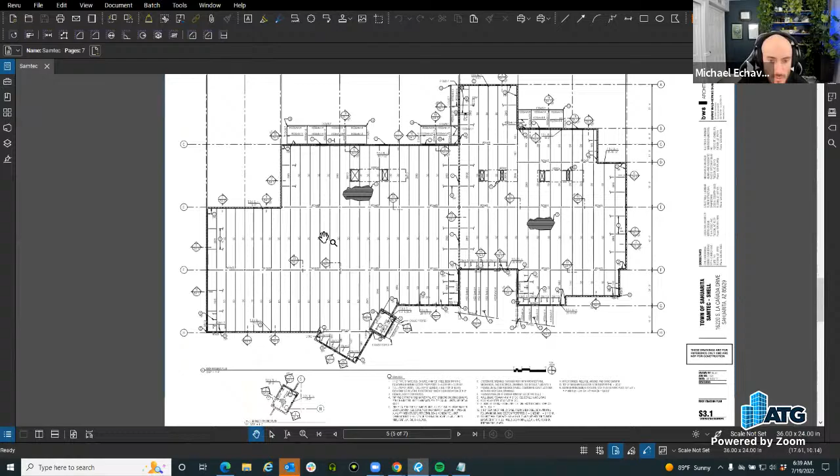But we are going to be talking about counts and sequences and how to create custom count and sequences. I'll go through and use a typical set that I've created before when I was in industry - it's going to be a structural set. We'll go through and maybe count some of our columns in place, and we'll create our custom symbols around them as well.

As you go through and get ready to create things for some type of itemized count, there's two different ways you can go through and do this. Jason just taught me an additional one because I never even thought of that either, so it'll be cool and interesting to recalibrate that in terms of having some type of area measurement grouped within it, so you could get a measurement within the group. So I learned something new. We'll go through and talk about how we can create these.

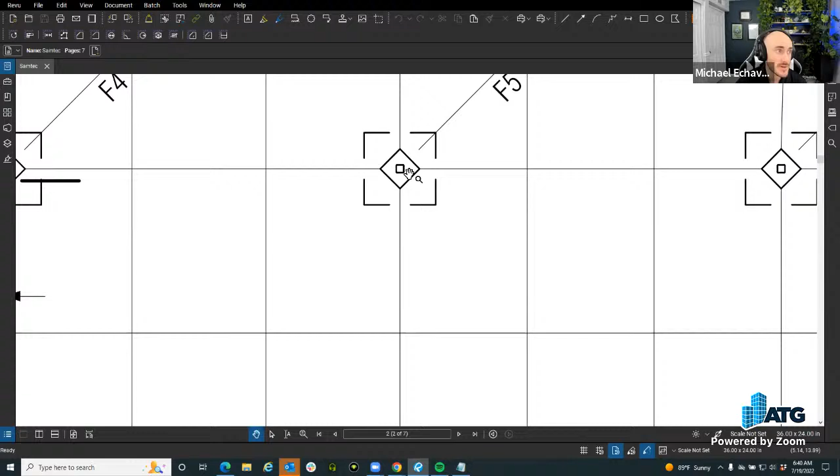So if I want to create a custom symbol, I can go through and create whatever type of symbol I'd like, and it's probably going to be an opposite type of symbol, so I can visually see the difference of something going over versus a snapshot. If there's something you wanted to do that is an existing kind of symbol, like a column for instance, you could go through and create a snapshot.

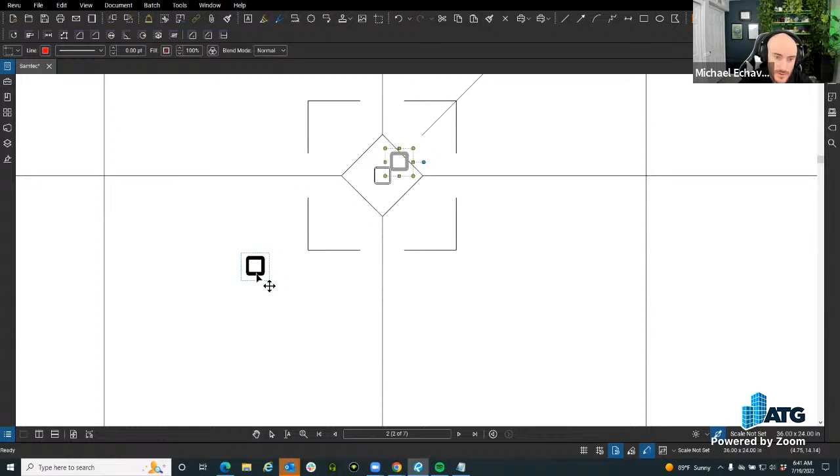So you could go and just edit, and snapshot this as your symbol that you would be using moving forward. Ooh, I didn't know that it wouldn't copy that same line weight. Okay, that's weird. Yeah, so going through and creating this into your new symbol as placement, you'd probably want to change the colors though.

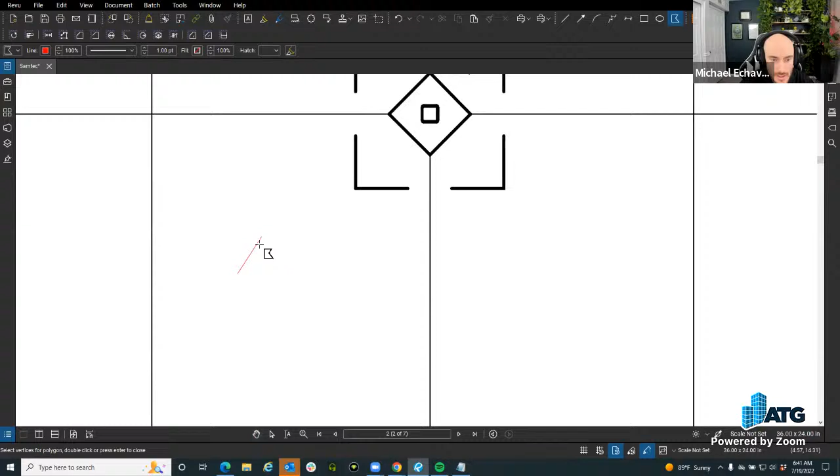But I'm not going to use this as my symbol, I'm going to go through and create my own. So I'm going to use a polygon and we'll just use a triangle for this next one. Ta-da. It's harder than it looks.

So the other portion is, okay, so I've done this, but if you want it to be a sequence, you have to have a value in here. And I don't want to make an editable tag, but we can cover editable tags as well.

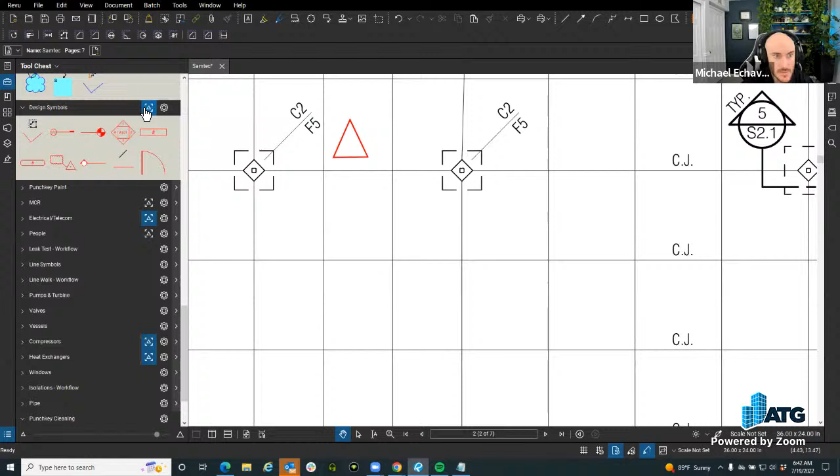So if you make a markup with some type of text in it, you can always edit the text later on. A perfect example of this would be some of the out-of-the-box symbols, so something like this, which would be an interior elevation. Oh come on, you have to have a scale for this? Oh, it's because it's scalable.

You could go through and change the text, right? But for this instance, I'll create one with text to have a visual increment, and we'll just put 1.

And for those folks that like to center these things, little tips along the way of knowing how things can be centered and aligned, because maybe it's not completely in the area that you want it to be. I'm going to select the text, go to style, and use the center align and also the middle. Then from there, you can select the text and select the shape by holding shift. So I place my text in here and then select my shape, and I can right click after the two are selected.

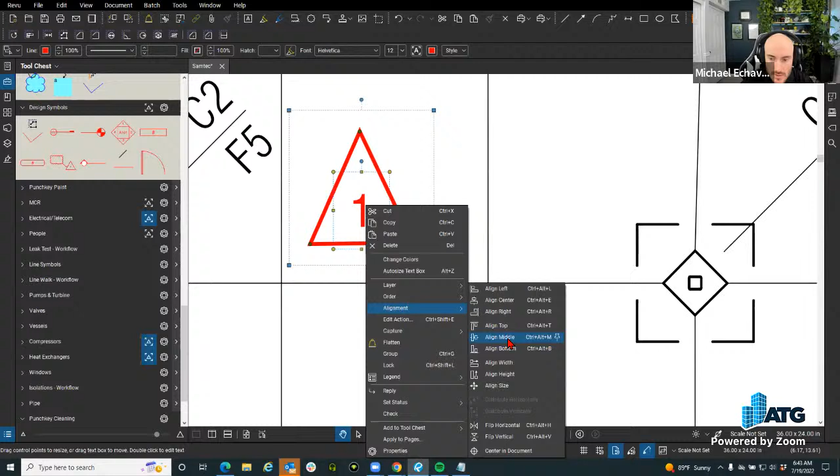I could have done a wide selection too, which is down here, but then we can go through and select my alignment and align to center, and then we can go back and align to middle. Technically, that's probably correct, it's just the triangle's a little off.

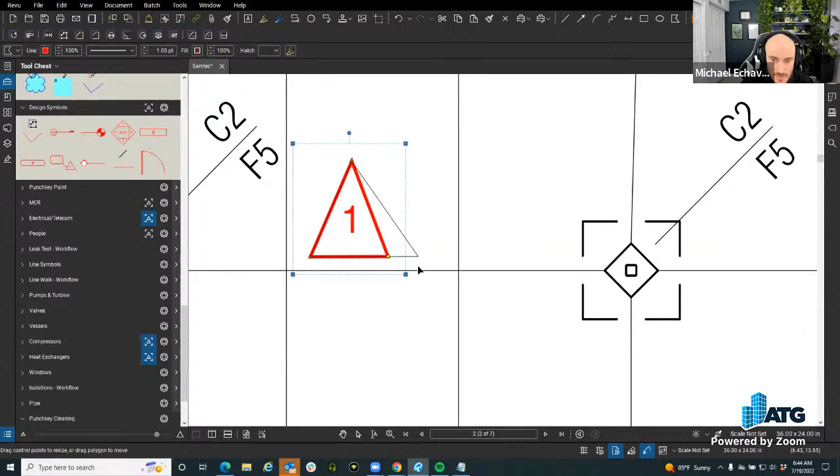Okay, so we'll just deal with that. I think it's because this isn't straight, and I wish you were able to hold shift. Oh, you are, okay, get it straight. You're trying to go for an equilateral triangle.

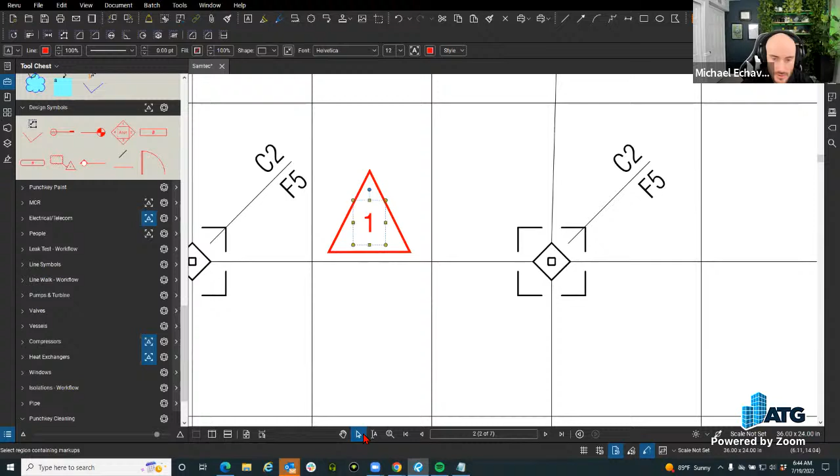Yeah, okay. So as this has been placed, what you want to do - I haven't really tried it with a wide selection, going through and just grabbing all and seeing what it randomly guesses is the order. But if you're going to create a count, you need to be aware of how you select them in order of placement. Well, I guess not really, because even when the count changes, it's going to change to a label. So just being aware of order of grouping.

If you aren't going to create a count, you need to be aware that if you select the text last, the text comment is going to change. So you always usually select your text first, then the shapes, so that the comment gets assigned to the shape versus the comment that's in the text, which is the value that you see visually.

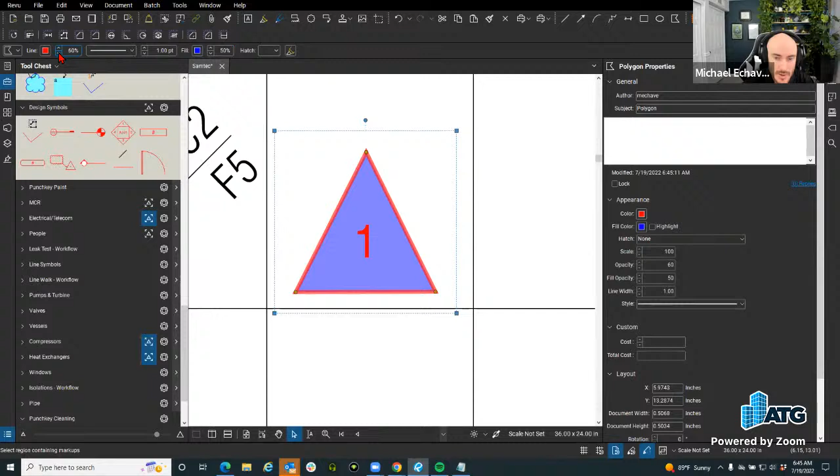But going through and creating this, I'm going to also create a hatch for it. We'll do a fill of blue, change that opacity, change this line opacity too. And we'll make this green. There we go. So now that I've created my custom markup, you have this thing called the tool chest.

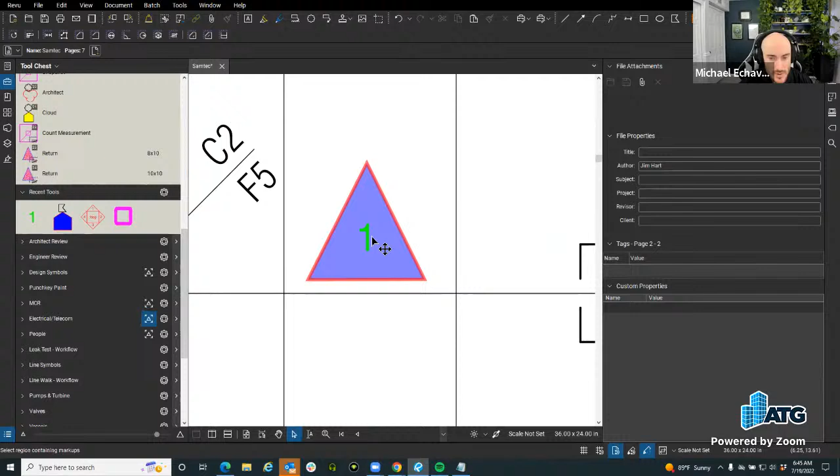So the tool chest - oh, I've already done this before, huh, funny. So going through and seeing your tool chest, you have your recently made markups, right? So this hasn't been grouped together yet. I need to select my text, then the shape, right click, and group, or Control G for the hotkey.

So hypothetically, if you're going through and creating these all the time to create a company standard, you probably would want to assign this to a hotkey - assign it to a key number for your keyboard or your mouse, right, so that you just press the button and it automatically hits Control G for you, or reassign it to a value on your keyboard. I have some additional items on the left-hand side of my keyboard, but you can make it a little bit more efficient for you to go through and create a lot of these.

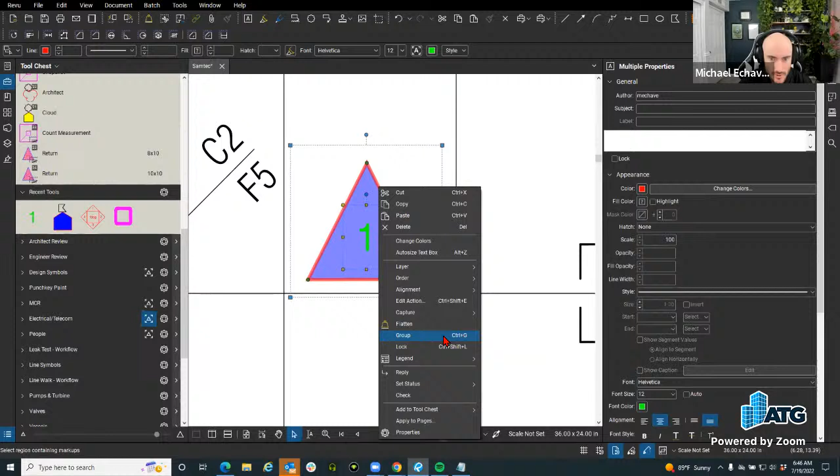But again, going here, we'll create it as a group. And then now I see this newly made markup in my tool chest. So we have the tool chest over here on the left-hand side. The tool chest is going to be the item that saves all of your recently made markups, and you'll see that in the tool set called Recent Tools, for those folks that have never used the tool chest before.

I'll just kind of midway go through and explain this. If anyone needs a little bit more explanation, just use the Zoom chat or the Q&A area. We'll have Mr. Artley checking all of the above so that we can go through, because it's going to be a little bit harder for me because the YouTube chat is smaller. I'm on it. Okay, so going through, I'm just trying to look at it.

That's why. But going through and creating our symbol, we are going to then add it to a tool set. So you cannot go from your tool set and create it from your recent tools - it has to go into My Tools or a custom created tool set.

So tool sets are kind of like an Allen wrench set - that's my analogy that I always use when we're talking about it. Basically, you have your toolbox, you have an Allen wrench set - and I used to call it Allen keys, but I guess no one else calls it Allen keys besides myself. So the Allen wrench set lives in your toolbox, hopefully, unless you have kids that don't place it back, or maybe you are like your children and don't place it back, right? That happens to me sometimes.

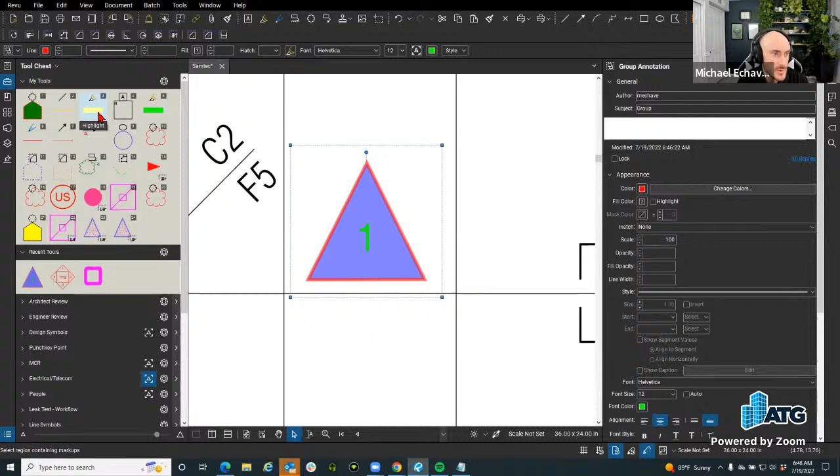I don't put my tools back in the tool chest or my toolbox, but that's where they live - they live in the tool chest. Your Allen wrenches live in your toolbox, and then usually you pick out the correct Allen wrench, or Allen key, for the correct bolt that we're going to go through and either loosen or tighten. Basically, that's the same thing here - we have our markup, which is our Allen wrench, that lives in a tool set, that lives in a tool chest. What do you think of that analogy, Mr. Artley?

I keep my Allen keys up on my wall, so it's not relevant. Man, I need to update my things. Yeah, no, it's all good. One question here though.

So as you were going through this and created your triangle, David thinks he can do it in about 10 clicks. Maybe there's a competition coming up, so start practicing. Ed had a question about the pick order: while you made that group, you have to pick one before the other. Which one, and why? If you group, it wouldn't matter for the count because the count gets assigned to a label.

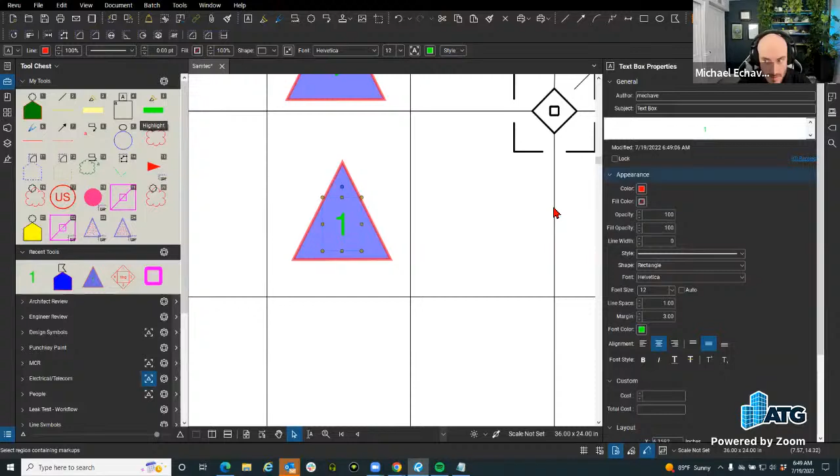Actually, I don't know, we're going to test it because I'm going to do it the wrong way. If I select the text here, we can see the comment is associated to the text, because if I change the comment, it's the text we're seeing visually. The comment is the text visual for a text box. Whereas a shape, it still has a comment associated to it, but it's associated to the shape itself.

So if I order the shape first versus the number, then the number or the text box is going to change later. Going through that same thought process, I group these - I have a value here now. If I type this in to give it some metadata, let's say I'm creating some visual item that has a number associated to it.

I wanted to give it some data before I make it into - this isn't changing it into a measurement feature, so count, because I'm going to test if this still does it when I create it into a count. But if I change the value to something different, like column, or this is going to be a 12 by 12, because I wanted to label it that, the comment changes.

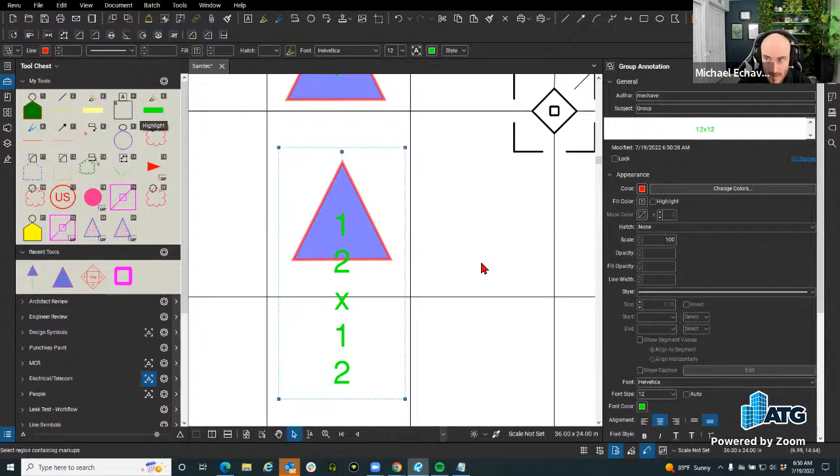But if I do it the opposite way - group the text first, then the shape, and group them together - I can see there's no value here. I can give it that metadata that I'm going to see in the markups list without it changing the text. But this text is still dynamic. If I wanted to change this to something else, I can, but the comment lives with the shape, not the text. It's super confusing, but that's why the grouping order is so important.

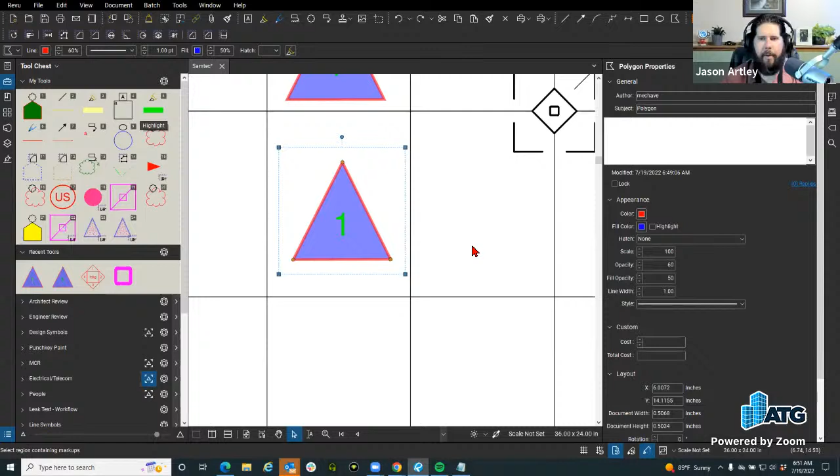But my other thought was I wanted to try this. So what are you trying? Okay, I want to see if I do it this way - the shape, then the number, the text - and if I go into create it as a count.

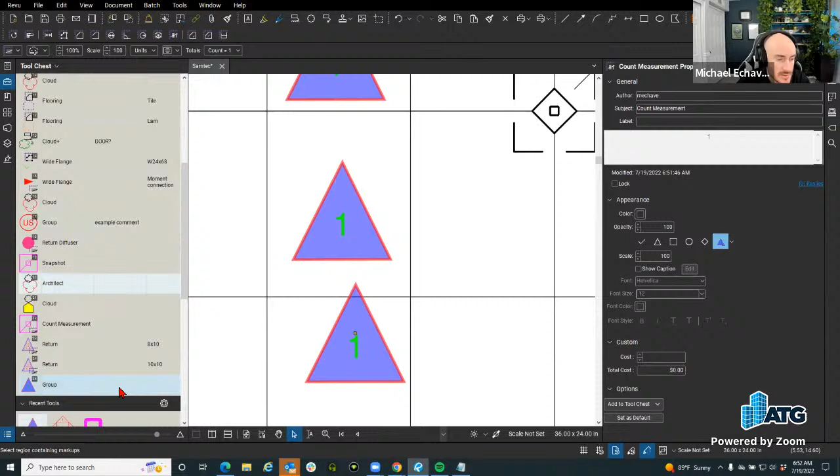I don't think it matters at this point because you can't change the comment in a count. Right, so it doesn't matter the order if you're creating a count, because at the point of creating the count, there's no comment associated to counts or measurements - it's subject and label.

Okay, so comment thing here, question: if you right click on the text and hit group, the order of selection doesn't seem to matter, but it matters only if you use Control G to group them. Question from Alex in the chat. I think the right click and Control G should be identical in function.

And it was - yeah, so for me, if I ungroup these and use right click, same thing here, then holding shift, select this, then right clicking group, I still have that number value. Okay, so ungroup them and then do Control G just for - oh okay, yep, I get it. So now Control G - same result, alright.

That's all we wanted to test. Well - not the same result? Not the same result. Okay, so this is a weird one. Nice find, Alex. Yeah, so if I thought he meant the right click.

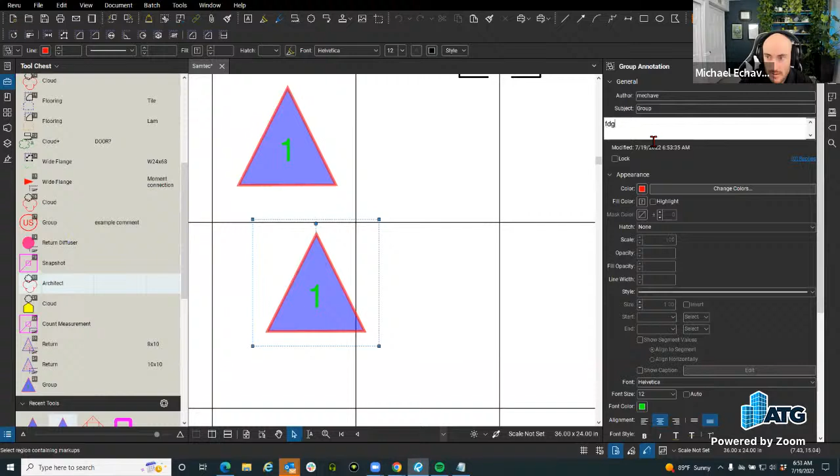Right click Control G negates the order, meaning it doesn't matter the order of selection. Because if I were to group this, it would have assigned it to this - the text. But Control G - yep, so Control G, regardless of order of selection, but right clicking grouping matters order. So the order does matter. Pretty weird.

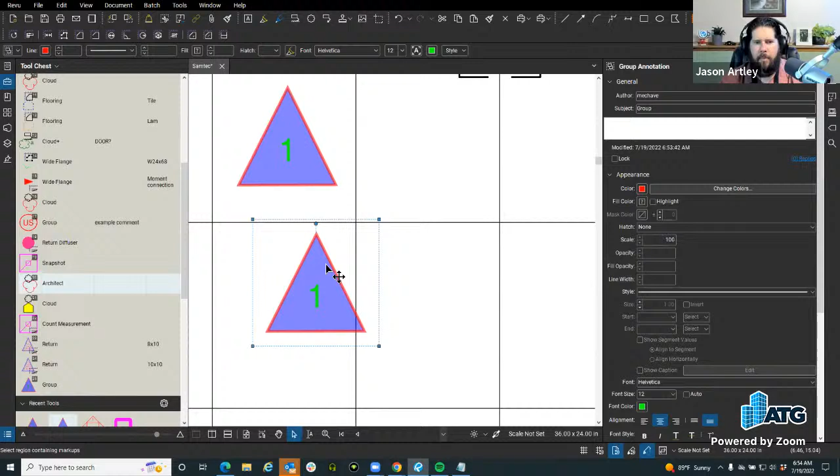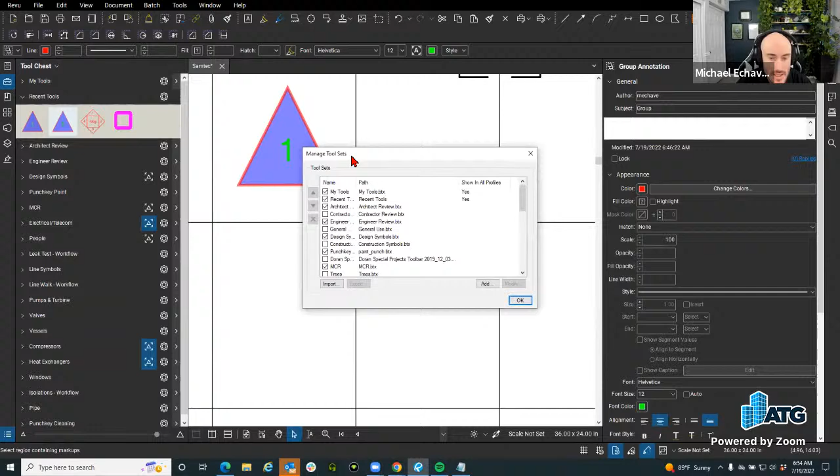From here, you can go to your tool chest and create your own. For those who've never created their own before, check the intro videos on how Bluebeam Revu works to learn this, but I'll gloss over it here. You have the option of going to manage tool sets, and from there you can go through and add your own.

You just give it a title. You'll probably want it to display since you're adding it now, so show in all profiles. For those new to Revu, hopefully we know what profiles are—if not, I recommend going back to the Bluebeam Revu basics and then coming back here. Basically, you can show it in all profiles or just one. It's not particular; you can't pick specific ones, it's either all or just the one that's active, and that's the way it saves.

So you title it, save it, and then from here you can drag it into wherever you'd like. Once it's been dragged to where you want it, you have your options to decide what you're going to do with it—you can right-click.

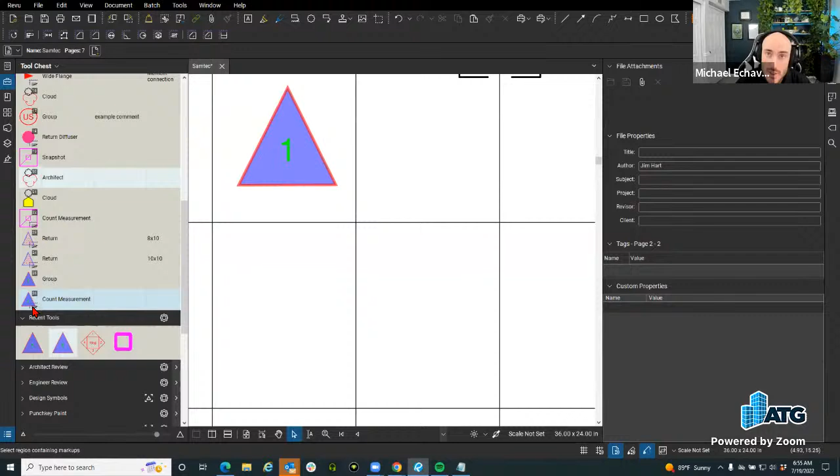Since there's a number value in here, it could be a sequence, which I do not prefer—some folks do prefer a sequence value, but I don't. You can create it as a count instead, which is what we'll do first. Once it's a count, it's a measurement, and when it has a measurement, you can change the subject matter and label for it. This will show up in your markups list as well.

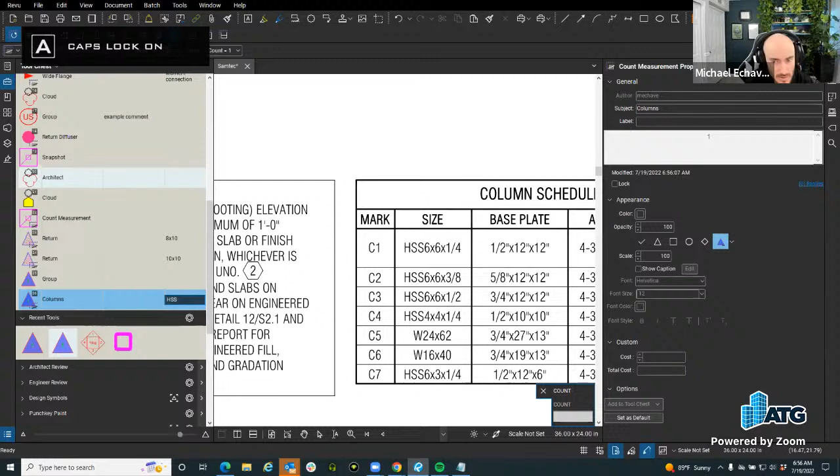I need to see what my C2s are, and they're HSS. So we'll go through and say the type of comment—these are our columns, so we can sort our data. Then we'll have a different size as the markup itself: 6 by 6, 3/8.

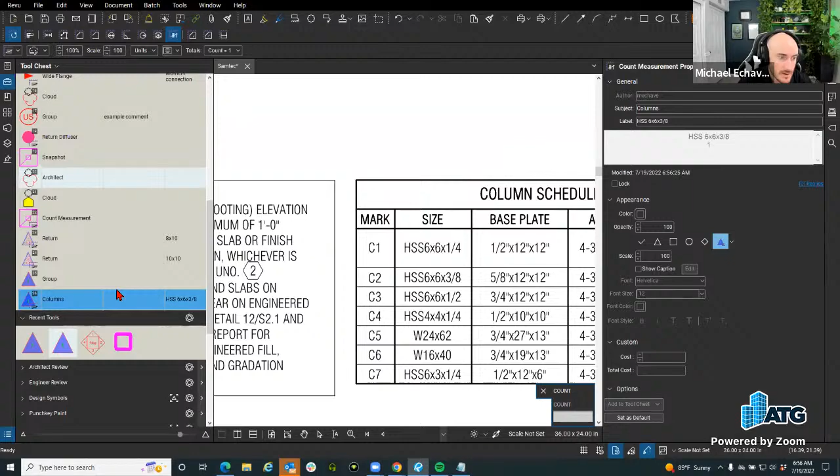Now that data lives with our count. As we go through and place our counts wherever we need to—we'd probably search, but I'm just going to place a couple of these. Now that data lives down here as an itemized count. So we have columns, one markup count column created, and the number of counts placed too. It's going to itemize them as grouped together.

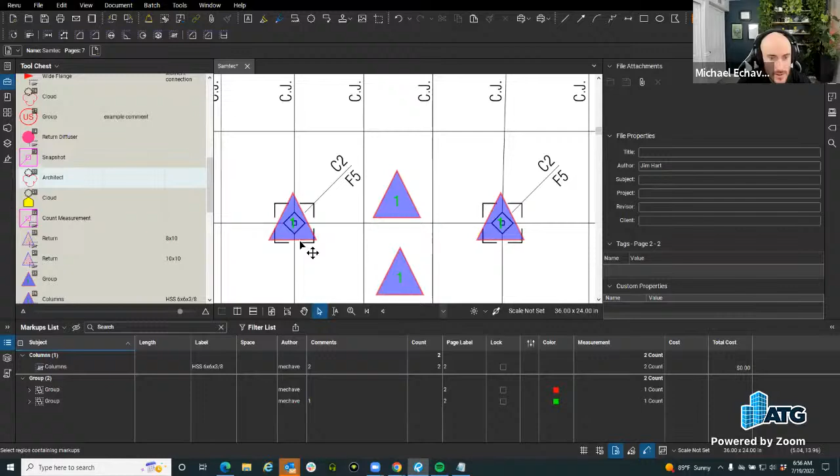Let me resume count so I don't have to worry about, 'ooh, that's a 3.' We'll just place them out here. Basically, it's not creating every instance placed and showing it down in the markups list—it's going to have them as collective columns, with the size grouped as a whole item together. Make sense?

So the next one is going to be the sequence, which I don't prefer, but some folks do because they're not going to use the markups list—which kind of bothers me, but that's your workflow. They want to visually count on the screen, which kind of comes down to the old style of pen and paper, though even then they probably just highlighted and had an Excel sheet next to them to input it into.

But you can always right-click—if it has a number value, you'll have sequence available, and you can define the sequence. Defining the sequence value, you get the option of deciding what value you want: numerical, I don't know what IIs are, it's probably like Roman, or alphabetical. So you have options to select what type of value you'd like.

I'm going to use numerical. It could have a prefix and suffix to the value, and you can start your increment at whatever value you want—it could start at 1 and increment by 2, you decide how that works.

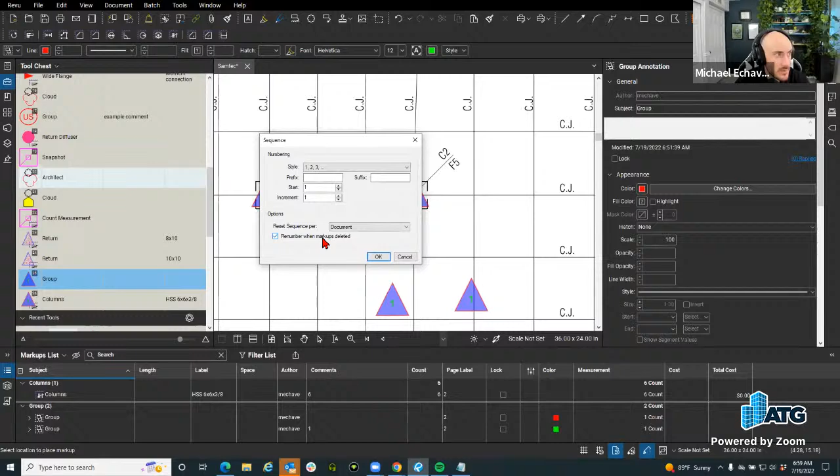Of course, I couldn't see why you would not want this, but that would mean if you placed a sequence value and deleted one, it wouldn't renumber all of them in the order of what it was before or after, right? So I'm going to hit OK.

Now these are two different symbols. You can see the count one I did first has the measurement symbol, and the sequence has a backwards play button, or skip - no, because skip has two arrows. Maybe it's a backwards play, or previous page symbol is what I'll call it. But now I can go through and select this, and as I'm placing it on my screen...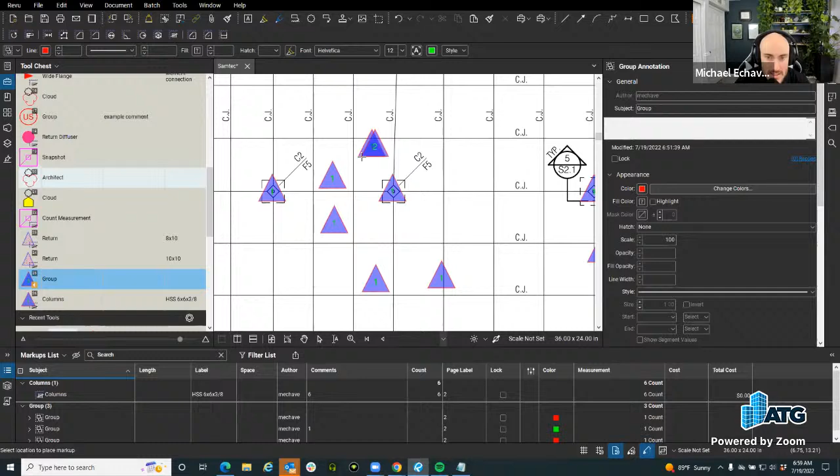It's going to increment the amount of what it is. The only thing I don't like about this is down here, every single instance gets its own instance in the markups list. So the count grouped them together - the group of every instance incremented on the page, but down here gave me a single markup for everyone placed.

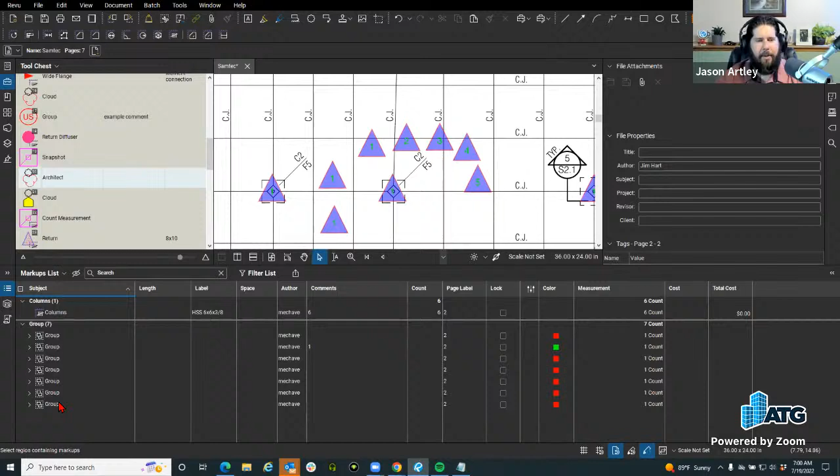Exactly, but it looks better on the screen or on the PDF. And you could minimize that group if you wanted to and collapse it. But this is where you could add more detail. I get the frustration on both sides. So I don't prefer this, but some folks like this because then they can visually see.

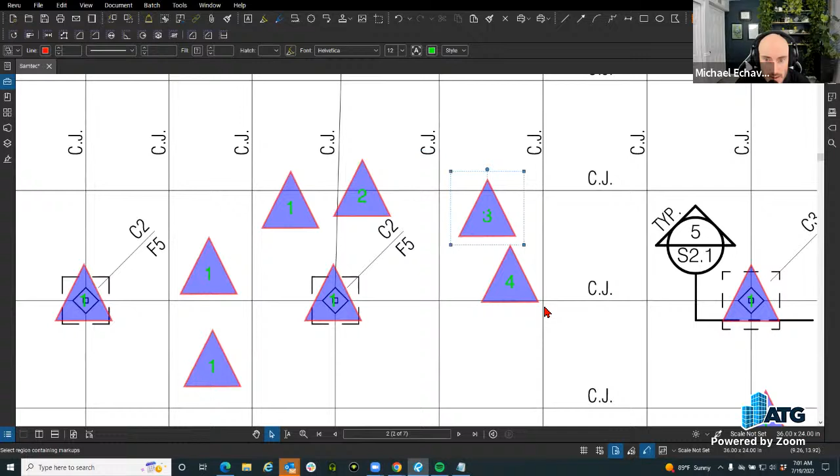Some tips with them though, just as we're using them. The sequence, since I said you can delete it, you can right click and delete the item and it will recount, right? You can change the sequence number, you can resume sequence, you can select the sequence itself, the entirety of them. You can auto size the text box of the sequences - that may be an option just in case it oversizes with too many values.

So you can change the sequence number if you wanted. This one should be 5 - it wouldn't work because it's not valid in the order. We'll do 2, and then we have 1, 2, 3, and then 4. You have the option of going through and doing that. You can resume the sequence.

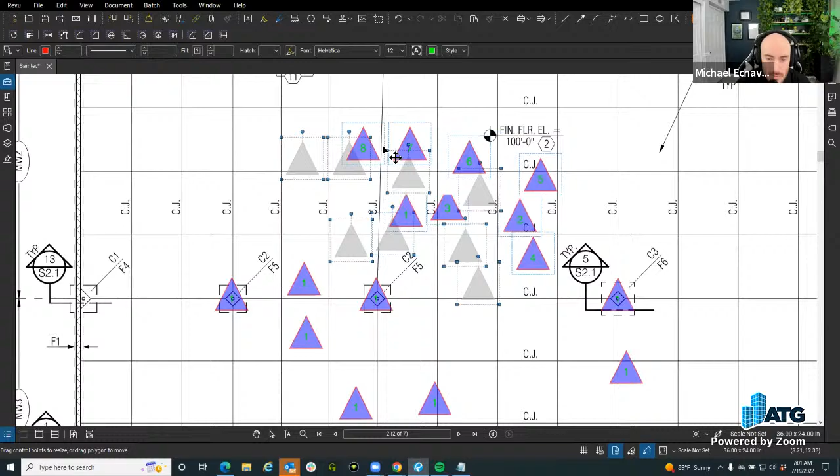So as they've all been placed, you can select the sequences and move them around if you needed to. Those are kind of your options with sequences.

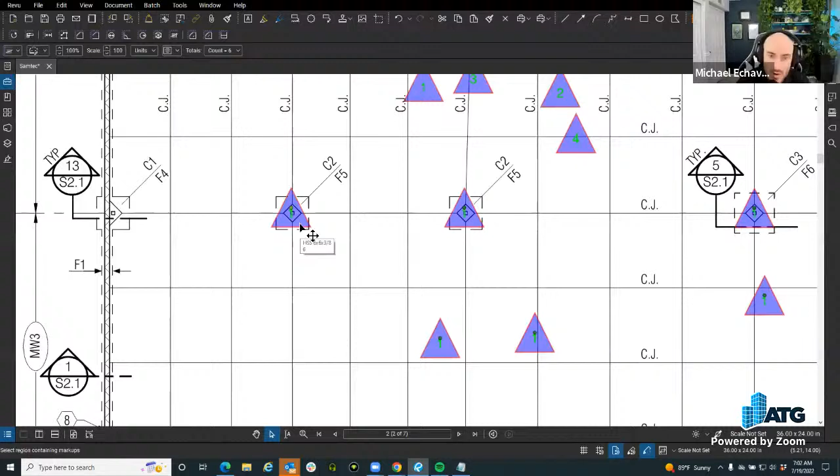Now counts, since we did the count, let me move the ones away that weren't counts from here to here - delete you. So these are counts. Once you select the count group, you'll see the nodes populate for the single grouping of counts that you have. And from here, you can see which one you individually have selected - it's marked with a yellow color. The ones with green are just part of the grouping of that individual count.

Now, if I go through to here, I can delete individual counts out of the total count realm. That is just by going through and making sure if you select shift, you can select the node and make sure you deselect your original selection. But as you go through, you can select multiple ones of these.

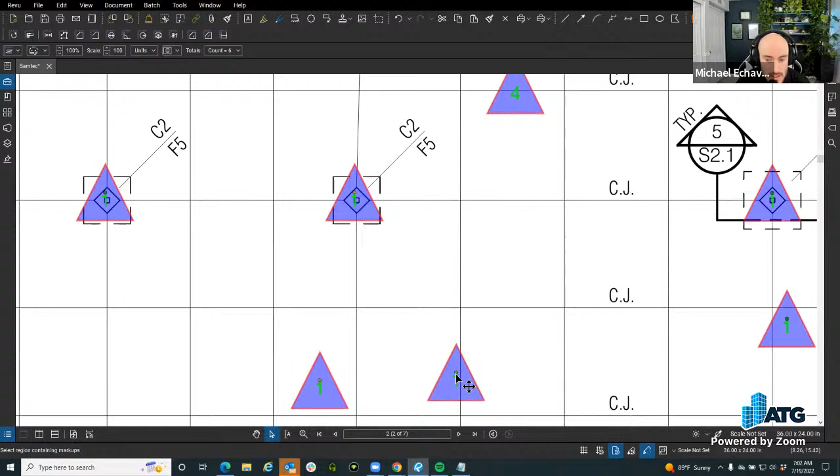When they're yellow, you can then right click, but don't hit delete because that deletes them all. You can delete columns, which is the ones you have selected from the group - so it says from the group, letting you know it's not the whole group. Delete is the whole group, but it's removing those 3 from the group. So I can go through and delete that.

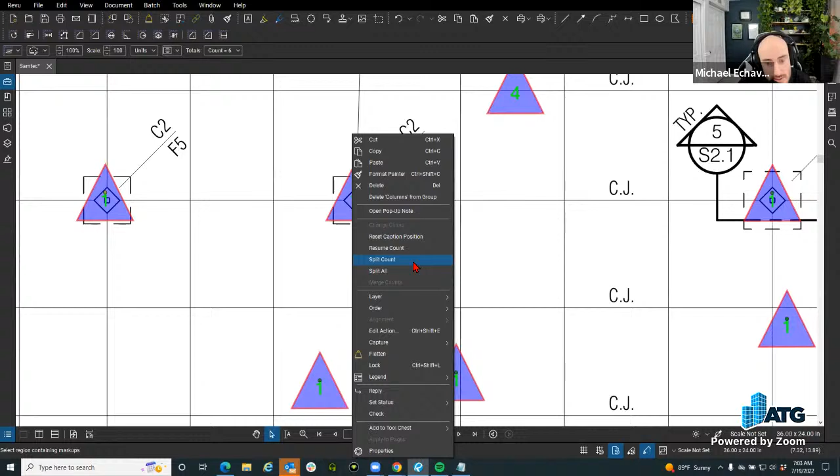The other option is resume counts - so if you wanted to go and resume the counts, you can. You can also split the count, but if you're splitting the count, it's with whichever ones you have selected. So be aware, if you want to split the count by these 2, you can split the count, and now these 2 are their own counts of the same type of count that you've created.

Can you merge them back together? Yes, so down here you can then select your multiple columns and you can merge counts back together. Ta-da.

That was David's question. Oh, I thought you were trying to just trick me. No, and I was like, look at that, Mr. You're on fire today. I'm backing off.

So over in the Zoom chat, Chris has got a question: can you make it a legend and then have it update? Can counts and sequences be added to legends?

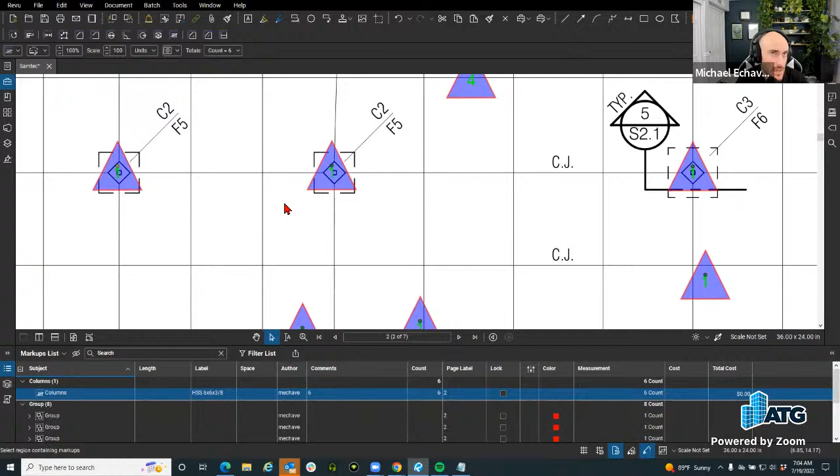Mr. Chris W, if you subscribe to our LinkedIn page, myself or Mr. Artley, we post quick tips, and I just created a quick tip on the legend feature. Basically this was because there's no native way to just right click and save legends. So you have a bunch of legends, which makes sense that you can add it to your tool set. We'll cover both for you. So basically, yes, you can.

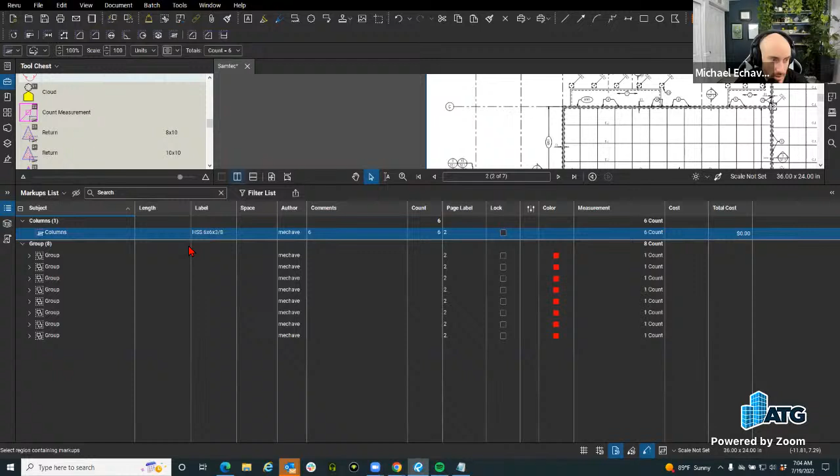Now that I've gone through and created my own, you could create a legend from something that's in your markups list already. We're not going to do that, but you can. You can right click and be selective of what you want. Why isn't... did I freeze or did Revu freeze?

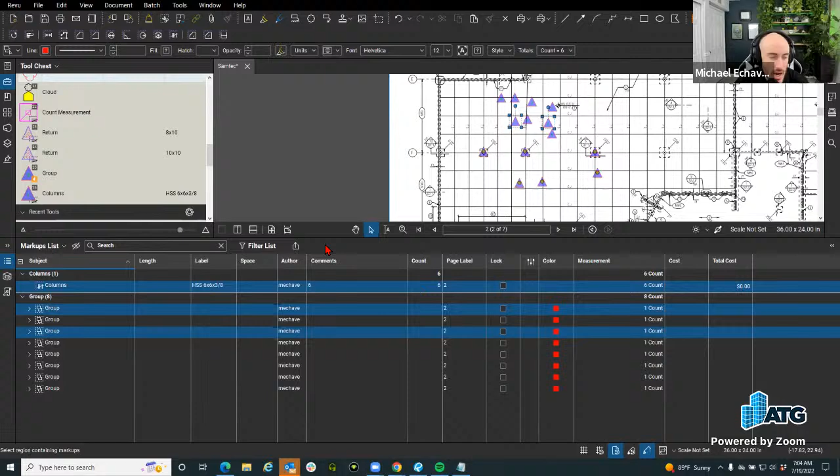I think I'm still good. There we go. So you could be selective by holding Control Shift. You can then right click and go to legend and create new legend. So you can create a legend from here, but that's not going to auto populate. And I think that's what your question was, Chris, but you can go through and auto populate the data for it, and that would be a better fit for something that you've created in your tools.

So if I go to my tools here, I can create a legend under... sorry, I just said you can create a legend. You can go to any of your tool sets. There's the gear symbol to the right of it. Have to have my instructor hat on sometimes during these. The gear symbol, and then you can go to the legend and create a new legend.

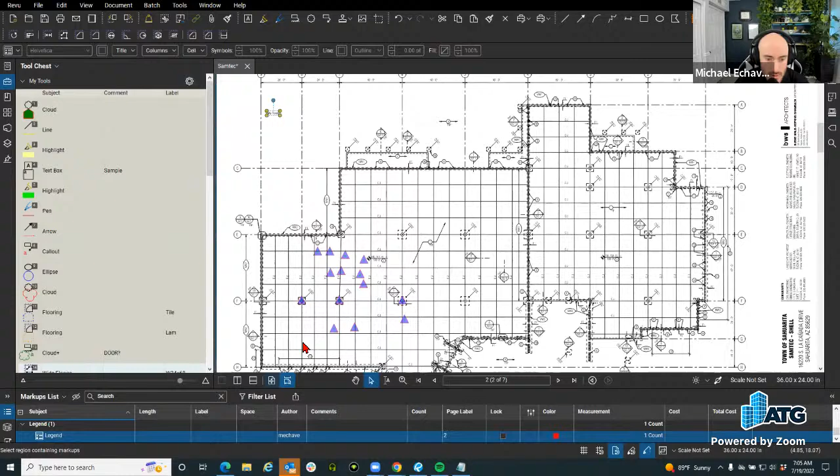This is just going to create a legend from what you've created already. And I hope my legends aren't broken because this has happened before. Revu is just not playing nice today. So from here, you can go through and decide what type of data you want to show. I'm pretty sure this is just... I know this has happened before.

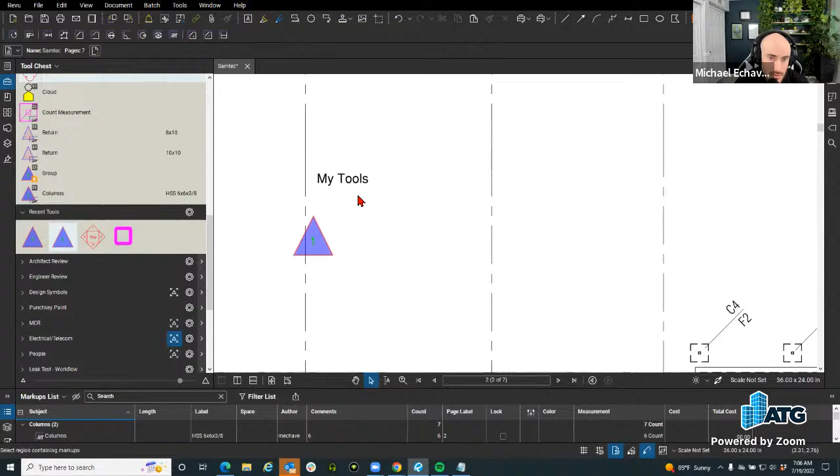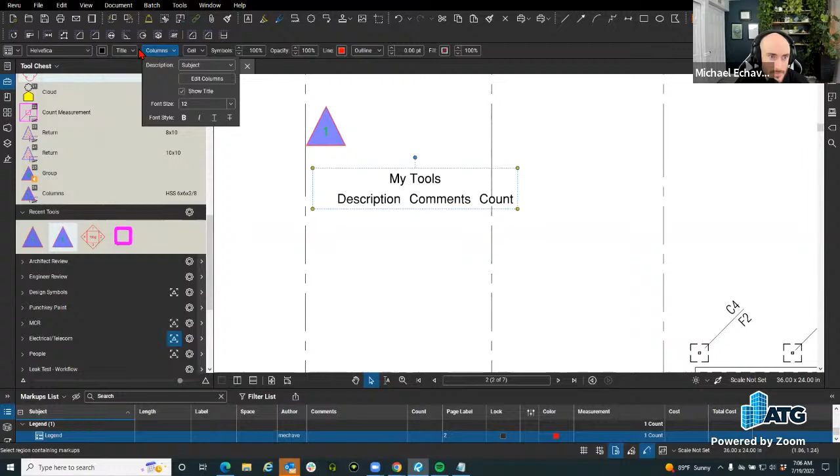Yeah. And I don't know why it happens to me, but the data isn't populating as well, maybe because I don't have titles on. No. Yeah, we've had this happen to you a couple times, and I don't remember. It happened to me in a training. Yeah, I had to exit out of the PDF and try it somewhere else.

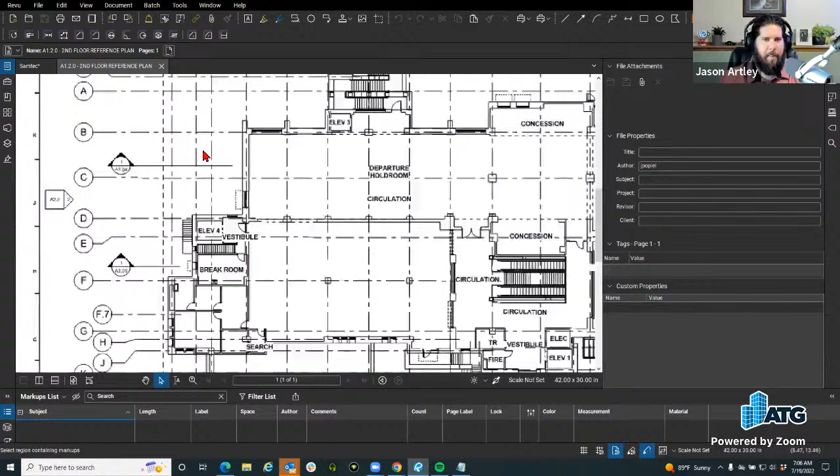Interesting. But that little clip that you made on YouTube is functional. Yeah, if you want to go to my LinkedIn page and copy and paste, you can. Okay, on it, on it.

I'm assuming it's the PDF because I think that's the PDF it's happened on before. So here, I have it here. It's working on this one. So if I go through... it's probably something, did I have a signature in one of these? Saving a legend in Revu right there.

Weird. But okay, so as you go through and customize these, and Mr. Artley is going to post the thing still regardless, but you can go through and create your legend for whatever data you want to show.

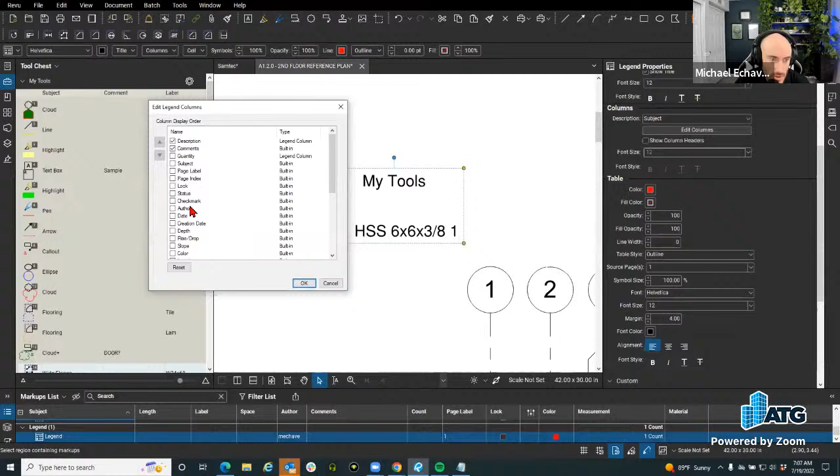So up here in your dynamic options bar, you have columns, you have edit columns, and then you have description. And then you can go through and we want count, and we can see what we have here. So if we've organized this the way we wanted it to be, maybe some grid lines with some additional point values so you can see them, maybe with a black outline.

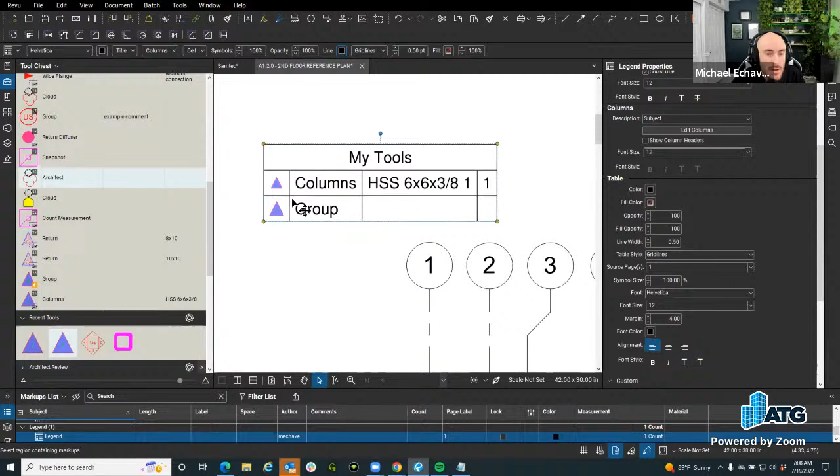Hey, I took the time to customize this legend the way I want it to look for my specific tool set, right? Before, you're like, well, you can't right click and just save the legend. But what you can do is add it to a tool chest, which is kind of like right clicking and saving a legend. After I did the video, I was like, Michael, that is like saving the legend. So in the video I said there is no native way, but there really is. And I was going to go edit it out, but I was like, whatever, it's already done.

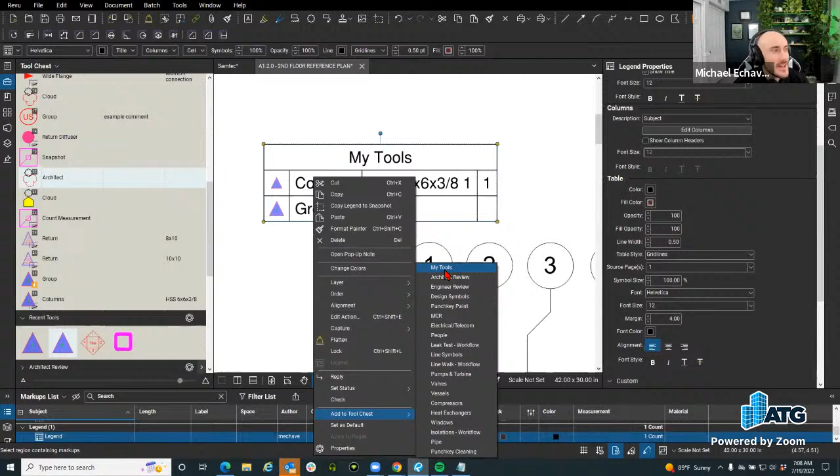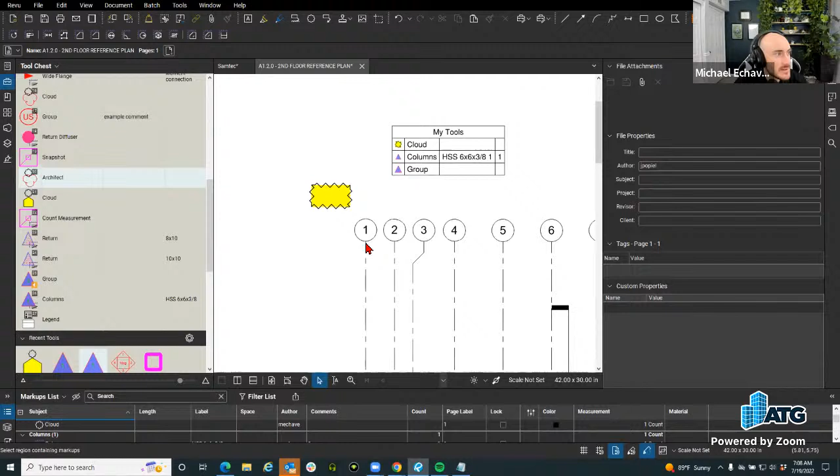But you can go to my tools, add it to my tools. Now, anytime you place it, it's created the way you want it to look. So then you can just click this, place it, right? And it will itemize for any ones that have been placed. So any of these that have been placed, it will add them just like that. So it magically updates depending on what you want it to show.

Yep. And this is because it auto updates since it's from your tool set. So whatever tool has been added to your tool set - and I think I've done it where you can add a new one and it still works. So regardless of you adding new ones later on or forward, it will still populate and show them in the tool set in your legend. Whereas down here, you have to select which ones you want to go into the legend if you go that way. Hopefully that helped, Chris.

I would imagine so. Yeah, you can also save your layout as default.

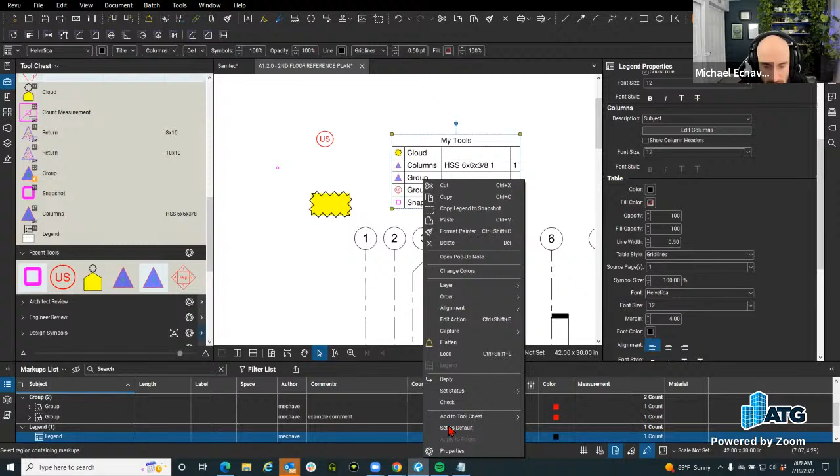I don't like to set defaults though. I wish this tool was never here. It causes more problems than I think it solves. But some folks really like it. Yep, because tool sets are too hard.

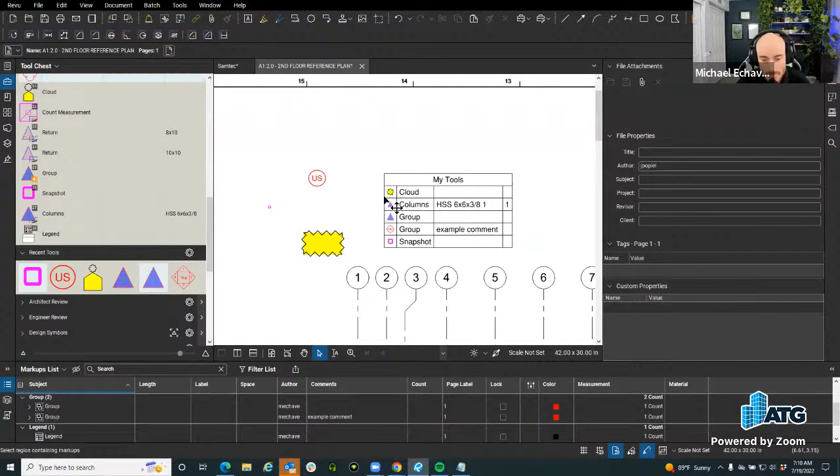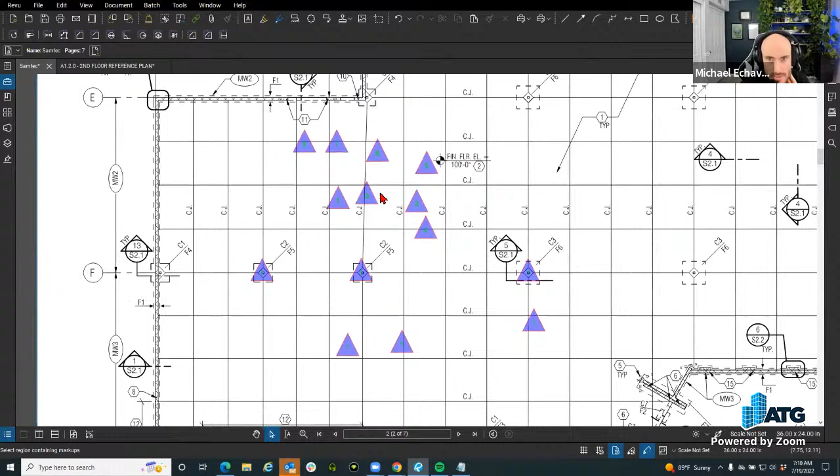Pretty magical. All right, so you've done a count and you did the sequence, and both of those were using your little triangle shape. Are you limited to polygons or can you use any symbol? You can use any symbol for a sequence, but you have to have some type of text to fill the sequence value in. So yeah, you can use any shapes you like. By all means, get very creative on what you want to show.

I mean, even with this text box, you didn't even need to create a shape because you can add a shape to them.

So that would be for sequence, but for your counts, you wouldn't want to do that because then it's going to change. Well, I guess you could even do it for that. I'm just thinking of doing like a punch list with comments and stuff. You wouldn't want to do that for those, which we're not talking about today, but we can if you have questions around those as well.

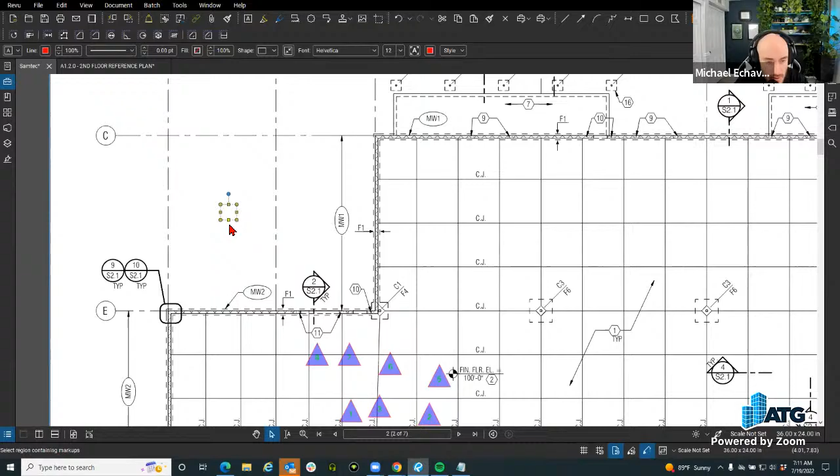Now let's get to that good part of what Mr. Artley was telling me about before I even started this. I'm not going to explain it because it's probably someone else's workflow, but we're going to go through it. I want to—I'll tee it up.

Okay, tee it up. So I was doing a Revu demo for a firm, and they do a lot of geotechnical work. He kind of threw the question at me, and I'm like, I don't know, I've never heard of anybody doing this. So I figured it out on the fly, and it worked out well.

So I wanted the opportunity to pitch Michael the same question, and I've kind of already teed it up in his brain a little bit.

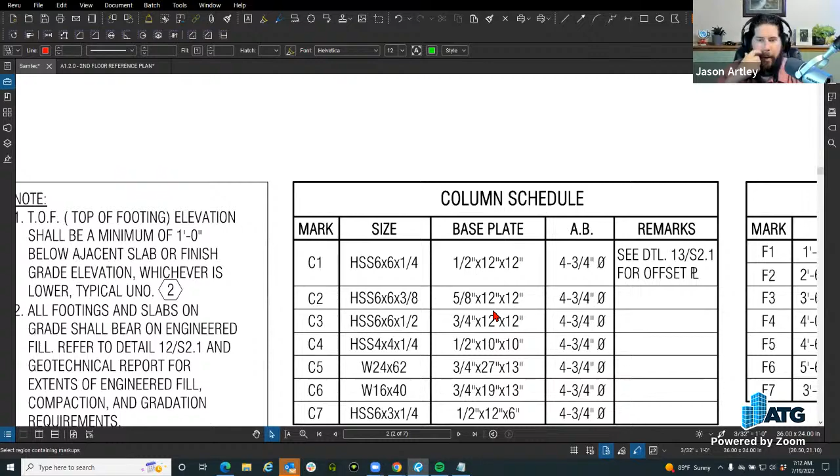But the question was, when they're taking borehole samples through the site, they want to have borehole 1, then borehole 2, borehole 3, and they're doing all this on a PDF. And from there, they don't just want the borehole to be a symbol, they want it to be an area measurement. So they can see that, oh, this 8-inch hole, cumulatively, they're going to be drilling this area of holes through the site. So can you do a count or sequence with an area measurement that will add up those areas and count them at the same time?

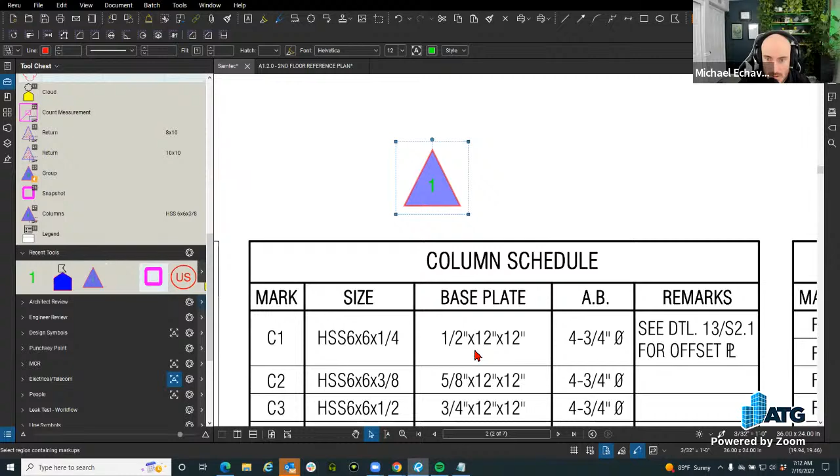So that was his question. I'm going to ungroup these, and I'm going to make the base plate size of what this is supposed to be with an at-scale rectangle.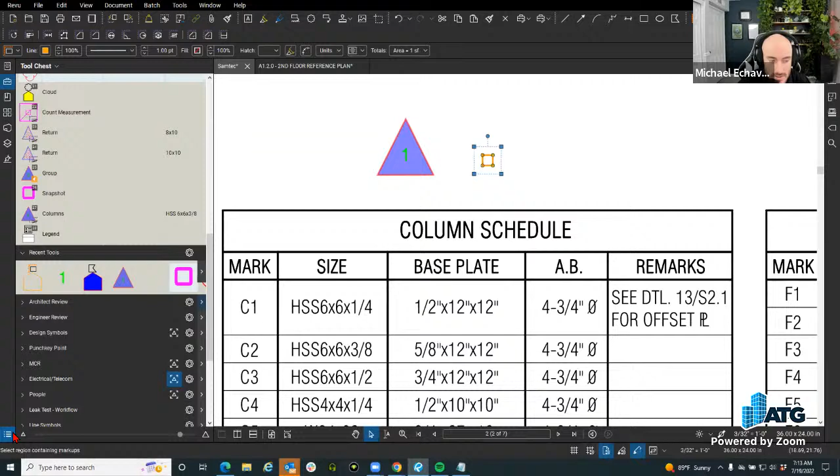Oh, nicely done, trying to top him for what he did. So I'm going to do 12-inch tab, 12-inch enter. And then I'm going to group these together because I have that size of measurements from my at-scale. So square foot 1, and I get all that data.

And I'm wondering, does the order matter? We'll figure that out. So yeah, I'm going to do this one last, and then I'm going to group these.

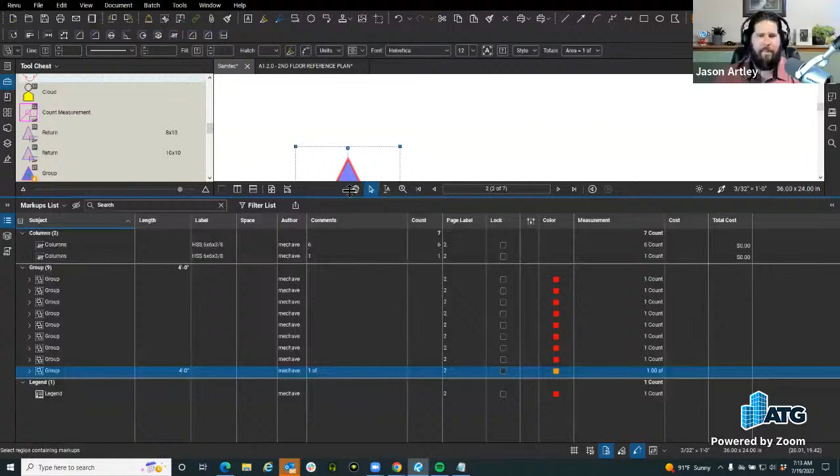You're putting 3 things together? You can't triple stamp a double stamp. I can't— this is not going to work. I just want an excuse to use that reference. It does work, it's right here. Look at that. Okay, wow.

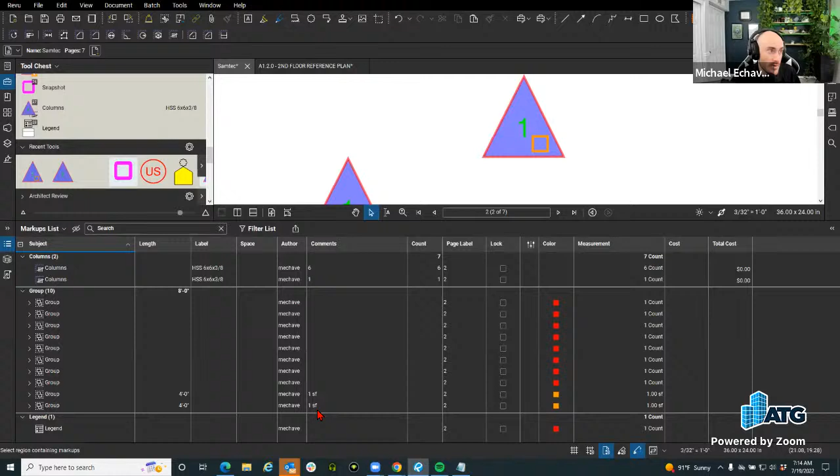So now all of that data lives with it. This is mind blowing, because you could have some measurement data that kind of is an itemized package of placement. But that's kind of the same thing with custom columns anyway, assigning another custom column—but now you can add a measurement to it as well, which I didn't know and didn't think of doing. So thank you, Mr. Jason, for finding this out for me. This is definitely going to be a new item to show.

So now I can go through and place this with my columns, and I could label them as subject and have the... let's add it into here. So the comments won't be able to be changed, but the subject will. You may just have to... oh, you can even put in a label now. That's so cool. So without even being a measurement, I could have labeled it.

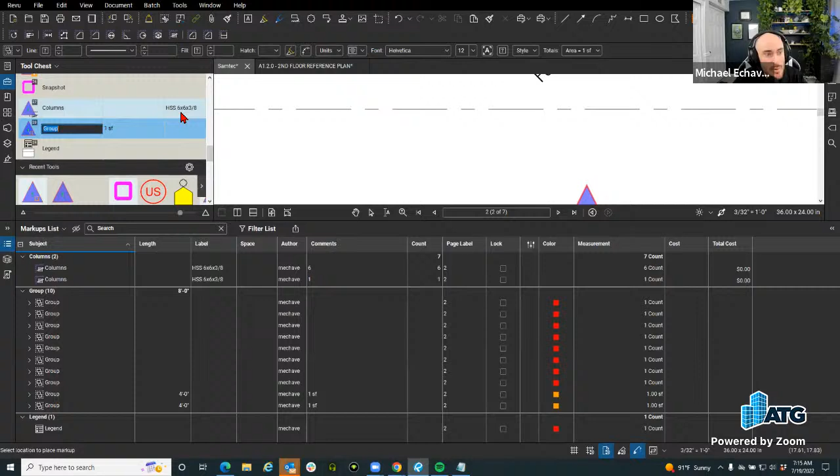Now my label would be the size of what it is. And then my grouping, which usually you only get a label if you have a measurement, but it probably gave you a label because there's a count measurement in there, which is at scale. That's really cool. So now I could do columns, whatever the size of the column is, have an itemized placement of those. And I could create a count.

What will it do? Oh, it removes it. Boo. Boo. Bummer. Okay, going back to this though, I'm still excited about this.

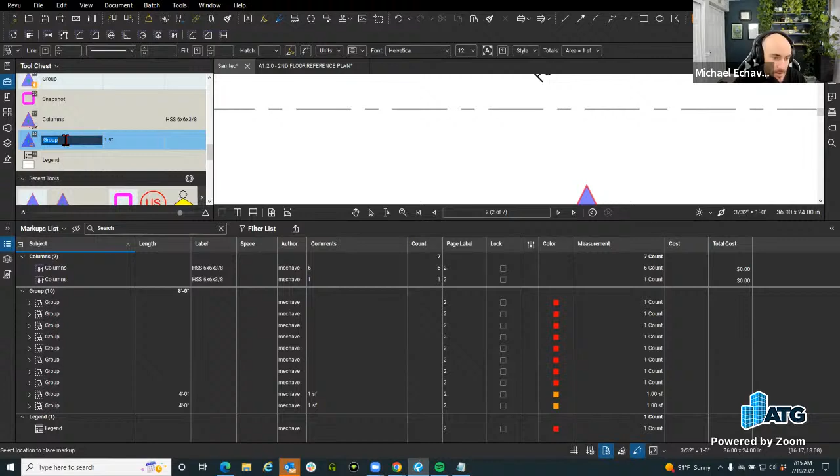I can go and add the size of the column and then the amount that it is. Just unfortunate because you can't create a count and it loses its measurement, but that's fine. At least I can get an itemized grouping of how many I need from here, right? As long as it says column, I could still see the amount here versus under count of placement of these. But that's pretty cool. Didn't know that.

Now I do. See, and that's a different workflow than what I had ended up coming up with. So this is kind of exciting. I like your symbology here. It works out well.

The way that I had done it, whereas I had just did an area of that circle, let's say an 8-inch hole. So I did the 8-inch circle, a measurement, and then I put the piece of text there that said 1, 2, 3, and then I gave it a prefix of BH number.

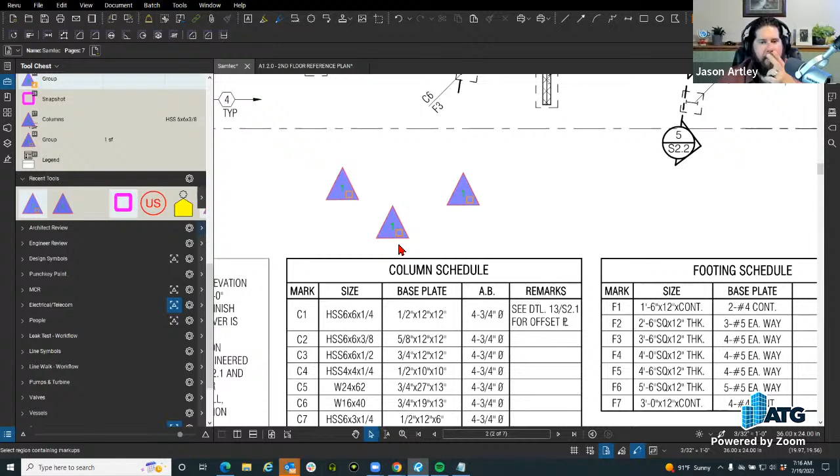Yeah, so borehole 1, borehole 2, and then it would keep adding them up. But this way, you've got the same symbol as well, and you've got extra data. So I think this is the winner that I've never seen before. Yeah, so we can do basically a symbol with some information that comes along with it, which is cool.

The only downside is that you can't change it into a count. Whatever, it's fine, because you can still use the amount down here, right? So if I would have given this a column, and then gave it that size, so I could just copy this, paste this.

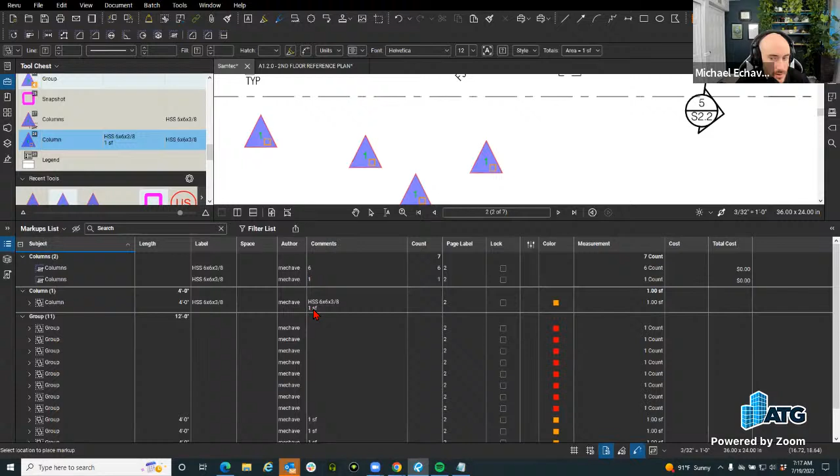Now when that is placed, ooh, that is weird. Give you label and the comment. That's cool. But yeah, now that when that's placed, right, I could still go and say, okay, well, let me go by label, and I can see how many I have here versus... it's unfortunate, but it still gives me a count.

But now I have an itemized, well, how many base plates do I need with that too? And maybe what is the square footage of base plate steel that I'm going to need overall per square foot? What are the pieces of steel as a manufacturer do I need to buy? Lengths of steel to cut for my base plates overall.

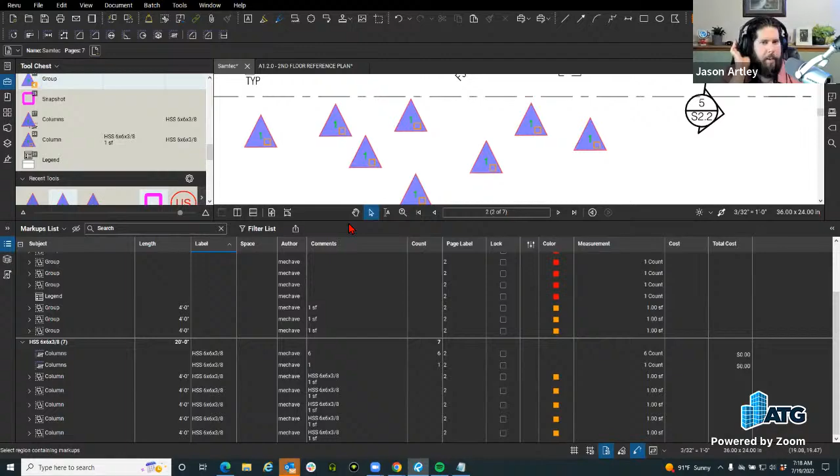Right, because that would then be your type 1 column, right? And your type 2 column would have something different. But you could have done that here too, where you just counted how many C2s you had and then multiplied that by your C2s and then got you your value of what you need for your steel lengths that you need to purchase for this job.

But going off of our column conversation from last week, which you can find on YouTube, you'd be able to then add up everything, customize your columns to give you cost, to do all types of things to make it easier to export without having to manually do math.

I mean, this would be a great way also to get an itemized list of information for install. So I used to do custom windows and door manufacturing and used to create production packets for the plant, but we also used to communicate with people out in the field and just making sure they had everything appropriate for install. So that would be a great thing too, is if you're going through and installing things out in the field, you could place these custom items that have a bunch of data with them at each interval.

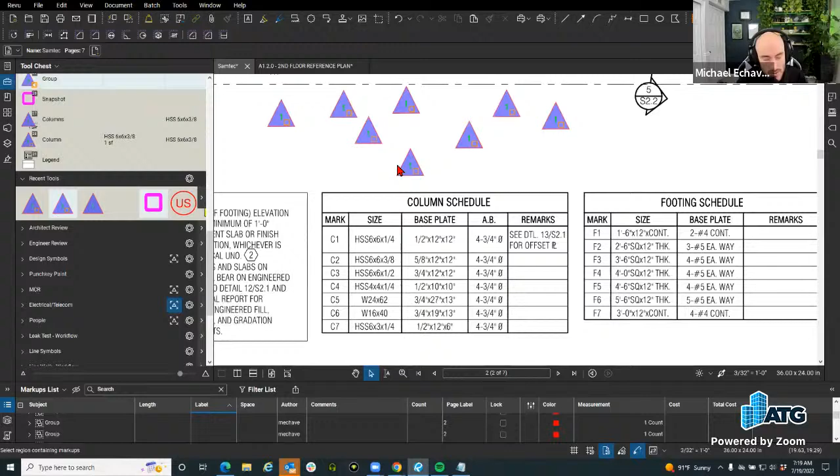And when you're out in the field, count what's there as well, because you have a list that should have had these items, and it gives you your own back-checking to make sure everything is there in the field appropriately.

Very clever. All righty. Any questions through this whole cycle?

I think you blew their minds and everybody's slowed down a little bit.